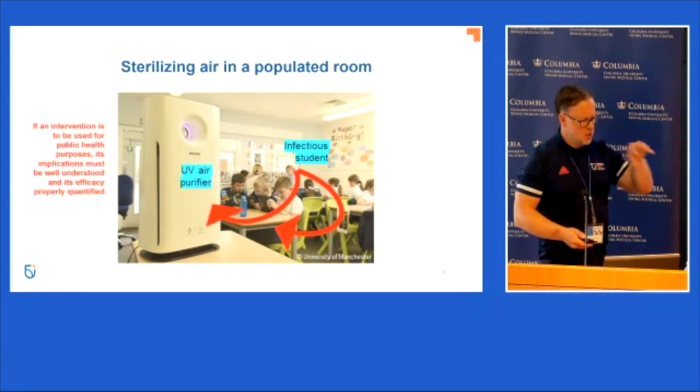Well, this is pretty much the same kind of problem, is that if you've got a Far-UVC lamp, you've got some virus in a space, in a room, it's floating around with the air, you've got some source of light. The only real difference is that the light isn't coming from the radioactive stuff, it's coming from the lamp. So it only requires a small change in the physics to get the outcomes that we want to see.

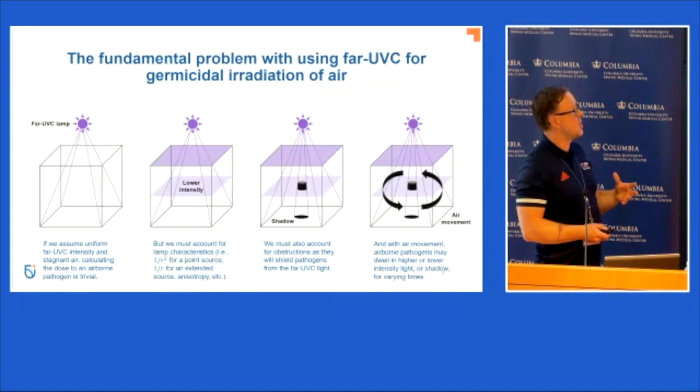So if we start thinking about all these different aspects, the complexity, we can think about the fully mixed solution, we can think about how far away we are from the lamp, we can think about shadowing, we can think about air movement, and all these things, they all play a role in the physics. And fundamentally, there is some nice physics that explains all of this. We can use the Boltzmann transport equation, nice sort of math up there. And we can use CFD using large eddy simulations and Navier-Stokes equations. And we can put some equations to describe survival of the pathogen and the inactivation by UVC.

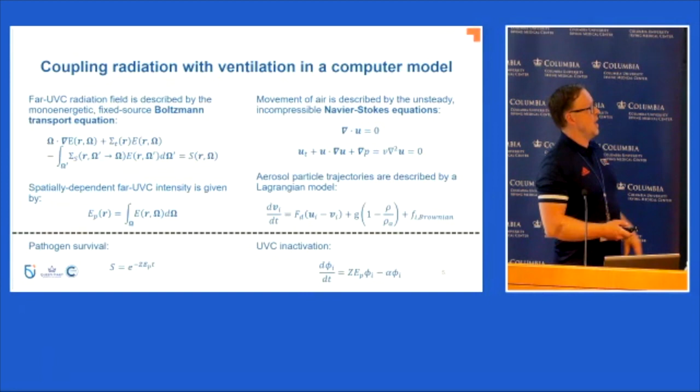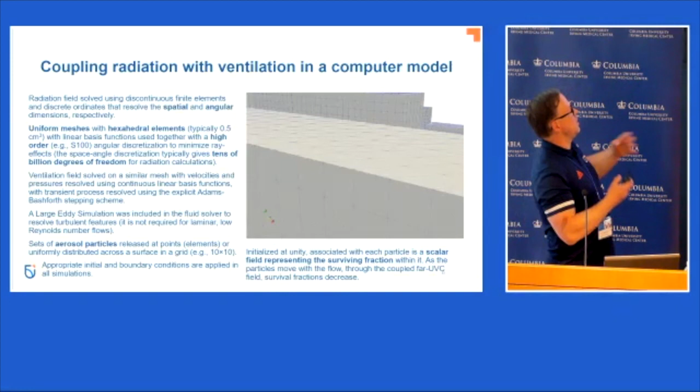So we take our domain, our room, our space, whatever we want to model, and we do a finite element simulation across that space, across that domain, depending on the discretization that we want to use. We put a discretization on the light source itself. Rather than using Monte Carlo, which simulates particles, we used what we call a discrete ordinates method. This is pretty common in radiation transport for looking at a solution everywhere. And that's quite important, I think, in this space for this kind of work.

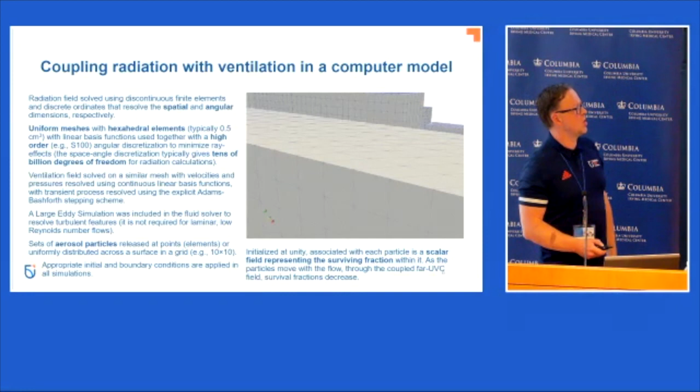We released aerosol particles at different points in the grid, a load of boundary conditions, and then we were able to initialize a sample at unity, some virus, some concentration of virus, and then watch as it dissipated and changed.

So we first started doing this. The first paper that we did came out in 2020. We actually got it done by the summer, but it took months to get out into the world. It was a simple 2D situation. Well, I say simple. We had a light source in the top right corner. We had some inlets and outlets, and we had the CFD.

And what we see here is we see a patient. Where's the light? Is that the light? There's the light. So we have a person laying on a bed, breathing out. Yeah, just breathing out one breath. And then we see how over time this circulates around the room, depending on where the inlets and the outlets are. And this then starts mixing things around.

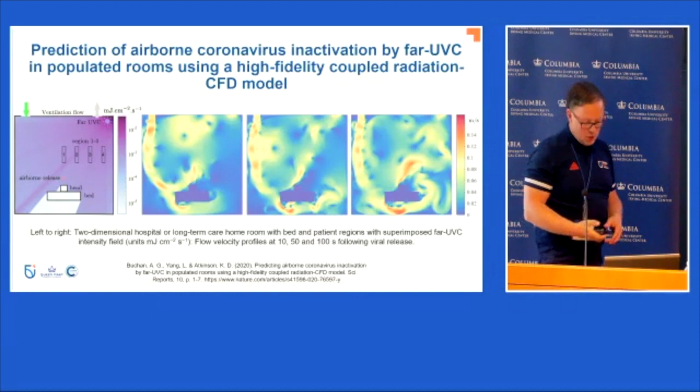But we see that there is not perfect mixing. There are concentrations in different locations, and we think that's an important point. So we looked at this and we saw that by a static flow, we got a certain decrease over time with a good airflow or with far UV. Whoops, wrong way. Here we see a far UVC illumination only, or a good airflow, 8 air changes per hour situation.

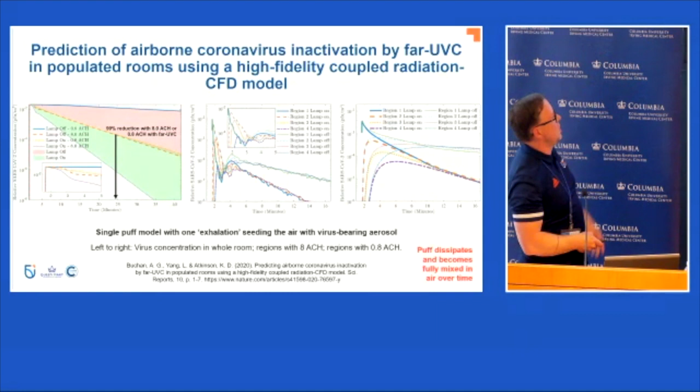And then the bottom one we see the case of the coupled far UV with the airflow. And we see that obviously it's decreasing the time it takes to get rid of the bug, and we can see the kind of orders of magnitude decrease over time. So this was obviously a puff dissipating in air and becoming mixed over time.

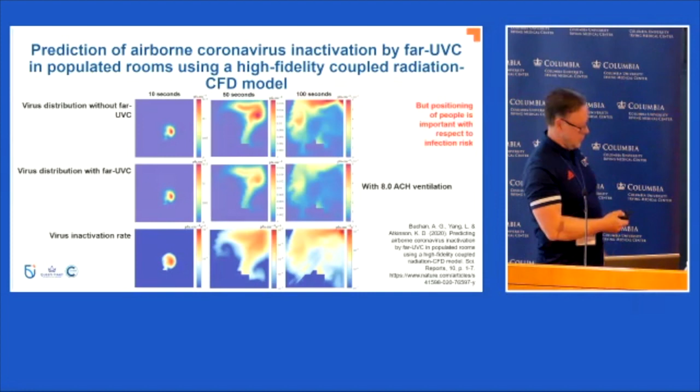We then started looking at this in terms of multiple breaths. We started thinking about positioning of people and their infection risk. If you actually look at the release, you see how the virus distribution moves around without far UVC, and then we see it with. So we see lots of difference as it circulates around the room. And we see inactivation rates being high close to the lamp, and less so away from the lamp, as you would expect. Nothing rocket science there.

When we looked at somebody constantly reseeding the air, so rather than one puff, multiple puffs, someone breathing, we saw similar behavior: very bad if you've got a low airflow, air removal, better if you have good airflow, and very good if you have the best. And obviously it reaches a plateau. Our simulation didn't quite get to the plateau. We ran it for quite a while. Some of these simulations we run on the UK supercomputer, the later simulations especially.

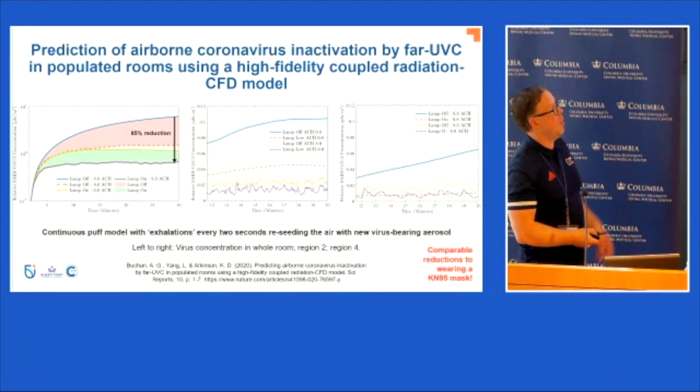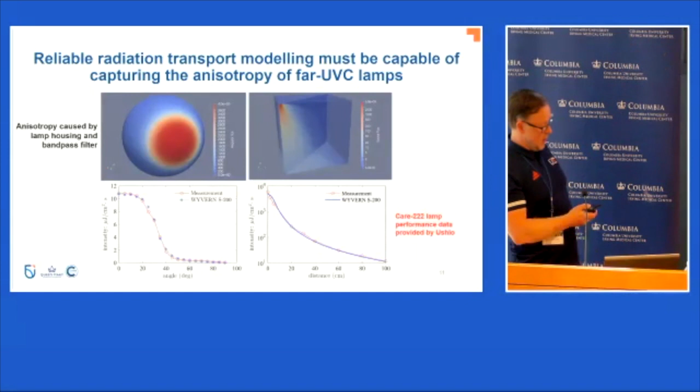But what we saw is something like an 85% reduction overall in the room, which we thought was pretty comparable to wearing some kind of KN95 mask, depending on how old it was. Importantly, we must be able to capture the lamp characteristics well. So we had some earlier data from Ushio that our model fitted very well. And then we started working with the Columbia group a little bit. They sent us some data of their chamber, the one that Kenny was just showing, and we started modeling that up.

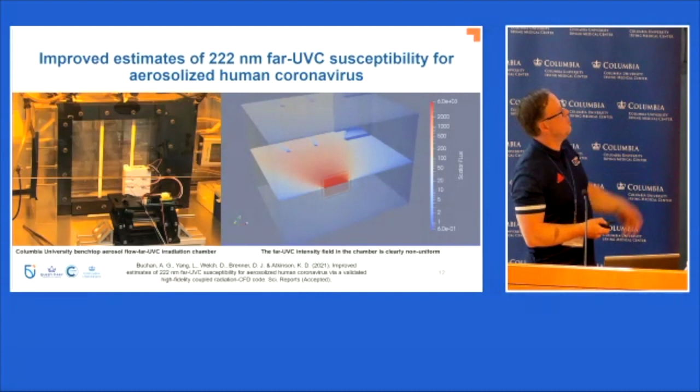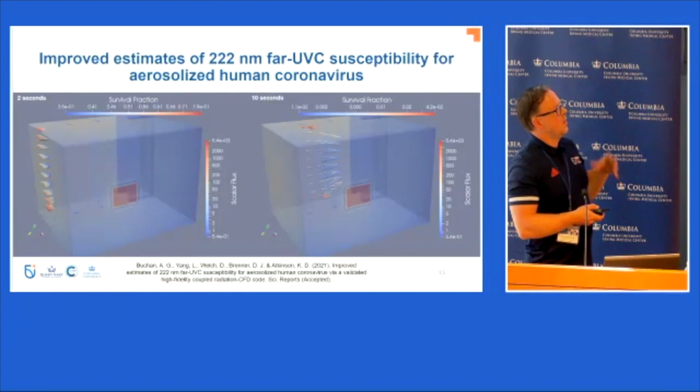And we found some interesting things. We saw that there's a non-uniform far UVC intensity through the space, which has an impact. We also found that drag forces on the edge of the chamber, how laminar the chamber flow was, all had an impact on the amount of illumination the virus in the air was getting. And the upshot is that we're able to find that the susceptibilities previously seen and used didn't look like the right ones for the situation under consideration. We thought that was quite an important result, and we got a paper out of that in 2021.

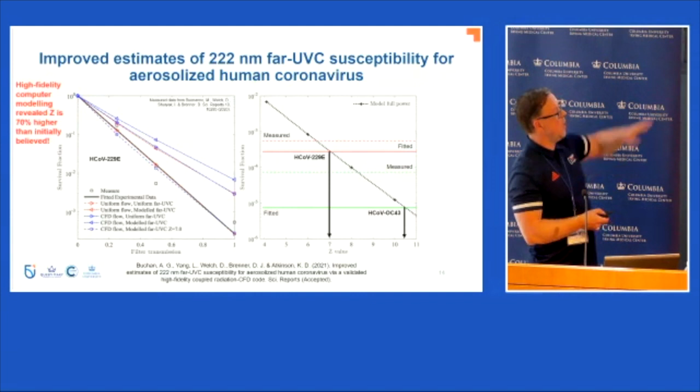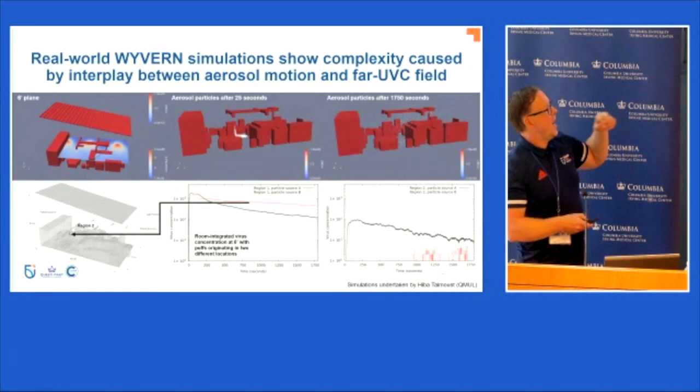Following on from that, you start looking at bigger spaces. We started investigating some workshops. Actually, I think this was in South Wales, a company in South Wales, and the team at Queen Mary's in London started modeling this and seeing how, depending on where you put the lamps and where you were in that space, because of all the obstructions, it had quite a significant bearing on the reduction and potential infection risk.

And we did similar things in meeting rooms, challenging that fully mixed approximation that is often considered. So we saw quite a lot of difference in terms of perturbations, in terms of sterilizing outcome from a given far UVC lamp installation. And obviously that's a problem if you're going to put these out into the world in a large deployment situation. Now, I've said that some of those simulations are quite challenging in terms of the computational resource that's required, so it becomes onerous to do this kind of work.

So, in a practical sense, you could overcompensate by using more lamps, for instance, or in certain scenarios where you have lots of people in a room and lots of heat generation, as the very first talk today was talking about, that mixing could happen. And it's probably fine, but in other scenarios, it's not. So it's very situation specific.

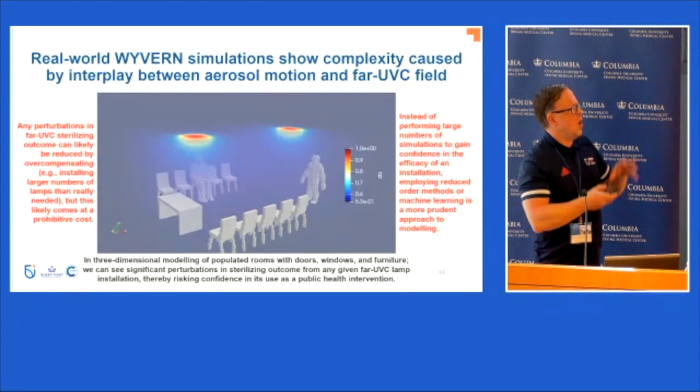And that may or may not be important in terms of deployment, depending on how you frame limits and the confidence levels that you need in the installation. If you're only using it as a nice to have, it's not that important. If you're using it to provide a given degree of protection, that's a different outcome. But rather than do huge numbers of simulations many times, what you could do is do a smaller subset and then apply reduced order methods or machine learning to this kind of problem to give you some kind of basis function that you could apply in a more simplistic model.

Now, whilst other groups were looking at the pathogen in large chamber situations, coming from the nuclear background, we had a slightly different thinking. We were more interested in the reliability of our code and trying to figure out the real world situations and how you might be able to do dosimetry in air in those situations. I was going to present something that isn't quite ready yet, so I'm not going to, but we did some early stage work where we think we might have a surrogate that we could use in the field for some assessment.

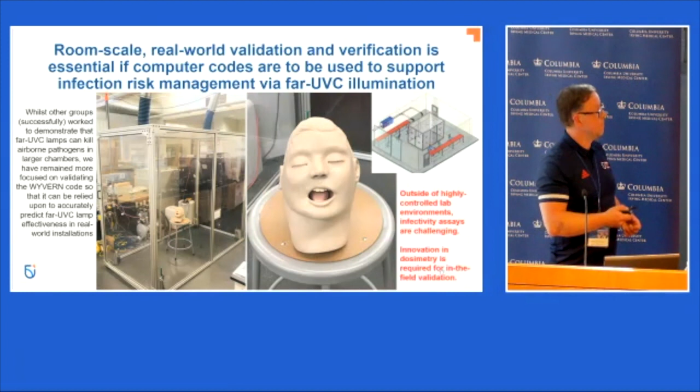Now, you might see that our team hasn't really published anything since that 2021, early 2022 point. And that's because the group in the UK that I was working with, especially at the Cranfield University site, didn't get any funding for this work and they moved on. And with that, they took their CFD solver with them.

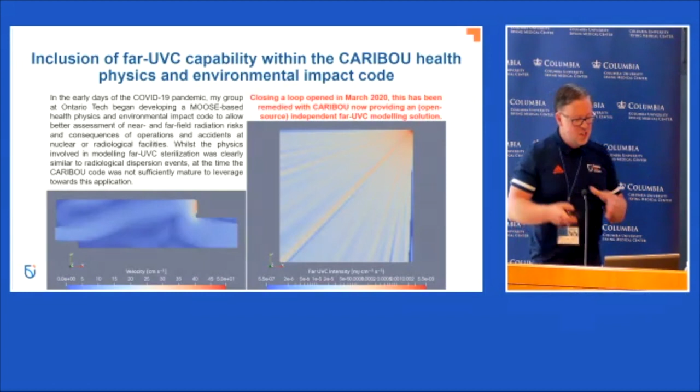I mentioned at the beginning that when I came to Canada, I was taken on to do a particular task, or one of my tasks, and that was to develop a health physics and environmental impact code for the nuclear sector to make better predictions of risk to people, especially in this small modular reactor era that we may be in. So we started developing a code in early 2020 that wasn't ready to go. It's just about ready to go now.

So we now have on the Canadian side a similar code that uses discrete ordinates that can do the CFD in 3 dimensions, and the code is called Caribou, and it will be open sourced. Probably not for about 12 months, but depending on the development level, we will open source this code for the community to be able to play with. People have asked, how would you be able to use this? Well, if you take a space, you've got a CFD model, you can run it through a mesher. There's lots of meshing software that's available now.

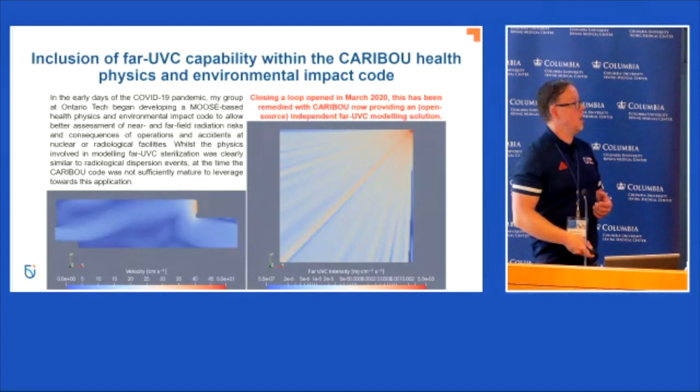Some given boundary conditions, you can do the simulation and you'll be able to get an outcome. So we have this ready to go with the Far-UVC now. Just need some more testing and some more applications to run it on. And maybe one of those applications is the Leeds chamber. Go a different way to what Kenny was just saying, and maybe that would be an interesting way to approach this. But that's one for later conversation.

Anyhow, so we get to the end of it. So we obviously know it's a viable technique for reducing transmission of pathogens in air. We know that it is good for that. We now know that high fidelity codes can model controlled experiments very well in the lab. So we've done that, validated the code, which we thought was a good thing to do. Very common in the nuclear space, so why not project it here? We think that we've got better estimates of susceptibility.

More experiments need doing. We need to test our code against them, to make sure that it's doing the right things. Obviously, we know that high fidelity modeling can help inform placement, but more validation and verification is clearly going to be required. And now the approach to modeling is pretty straightforward, I don't want to say trivial, but the way to do it is understood.

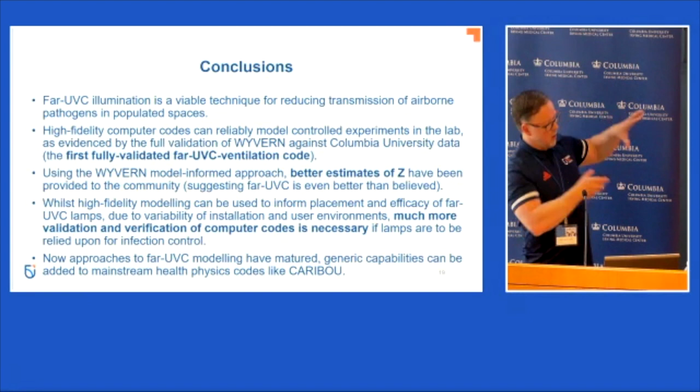So it's more a question of adding more physics to it and using a Moose-based simulation tool like my Caribou code. For those of you that don't know, Moose is a framework that comes out of Idaho National Lab. You can do all kinds of physics with it. It's really good. So we've developed that. Should be able to help with that. And that's more or less it.

So we've got a team of people involved. Me, Andrew Buchan from Queen Mary's in London, and Liang Yang from Cranfield, the Columbia team providing the data, and my group in Canada is just a couple of us right now. If funding comes our way, we'll do more. So there you go.

We have time for one question. Do you mind if I stop here just for a second? It's easier. So do I. Thank you for that.

I always wonder how much putting stuff in the room makes a difference. Putting furniture and stuff like that would make a difference to the flows of the particles. And it clearly does. Even in our earliest simulations, we saw how that flow changes quite substantially. So obstructions are quite important and need quite some investigation.

But one of the things that is always necessary, because I can throw anything in the computer, you need the validation cases to put it against. Without validation, it's worth nothing. So you really do need good dosimetry, good ways of quantifying the flows, and anything and everything else to build certainty and confidence in these, so that you can apply them in practice.